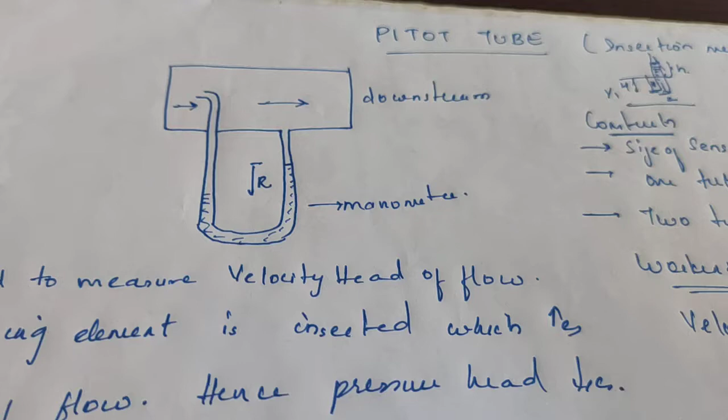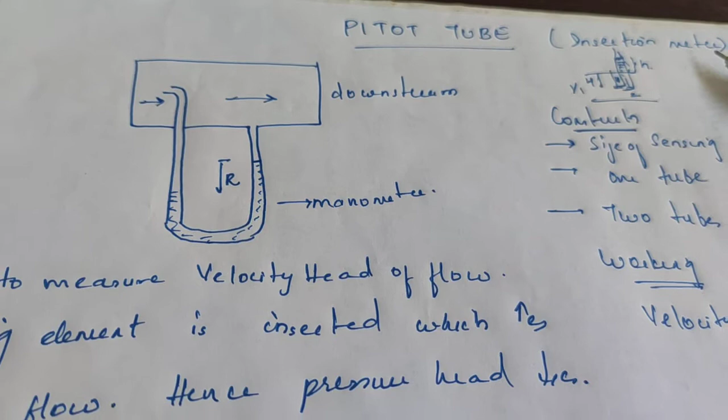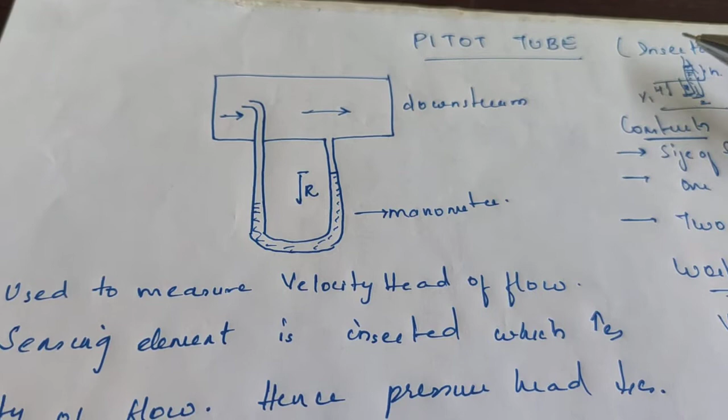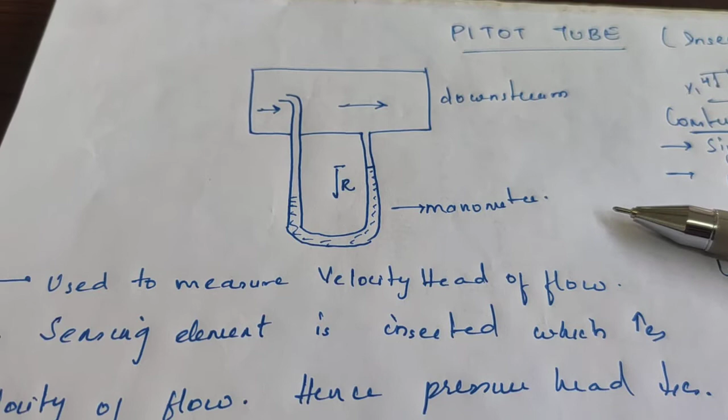In this video, we will discuss about pitot tube, also called as insertion meter. Like orifice meter is called as variable head meter, the same way pitot tube is called as insertion meter. This pitot tube is majorly used to measure the velocity difference, velocity head of the flow. In the previous orifice and venturi meter, we have measured the pressure difference, but here in this pitot tube we will measure the velocity difference, velocity head of the flow.

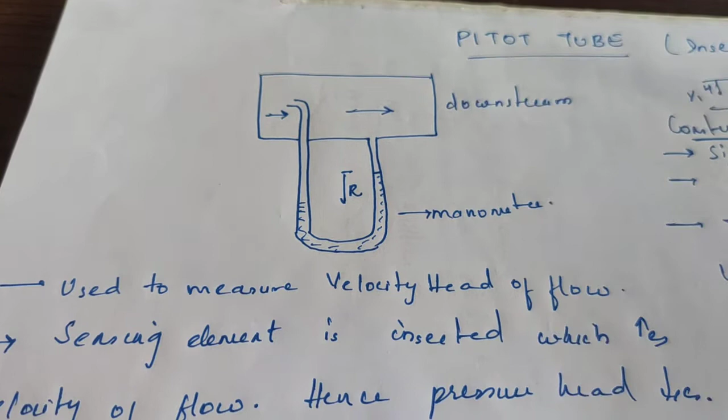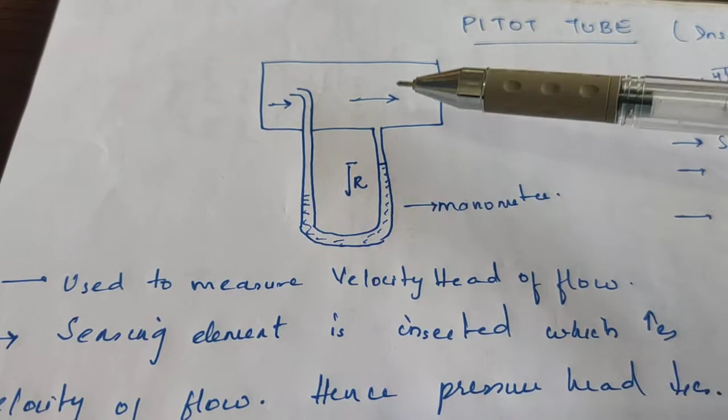Now in this pitot tube, a pipeline is there, a small pipe in which the fluid is flowing in this direction, and at the center of the tube we are attaching one manometer. At one side of the tube, the manometer is attached, and to the two ends of the manometer, two pipes are being inserted and attached.

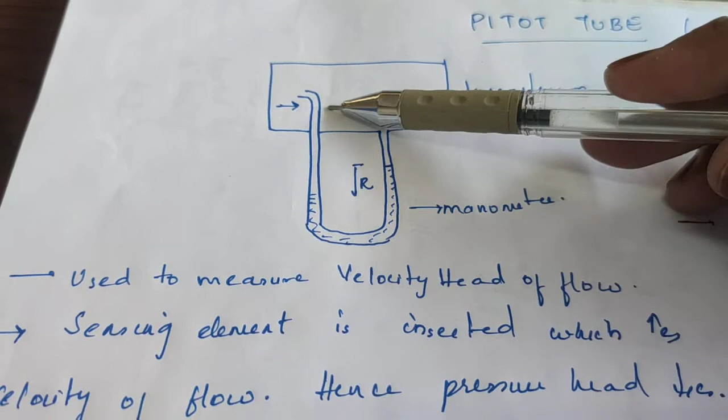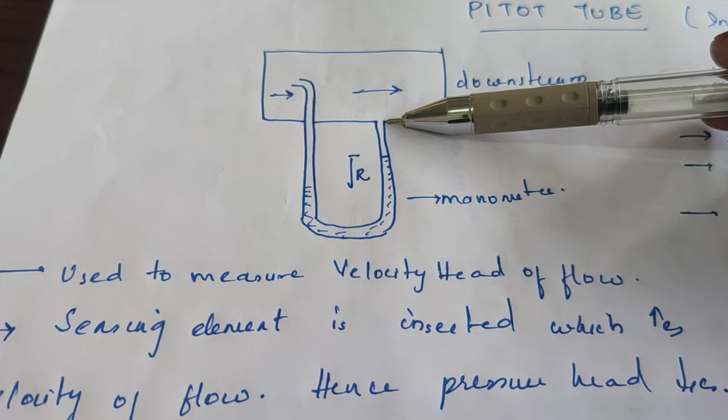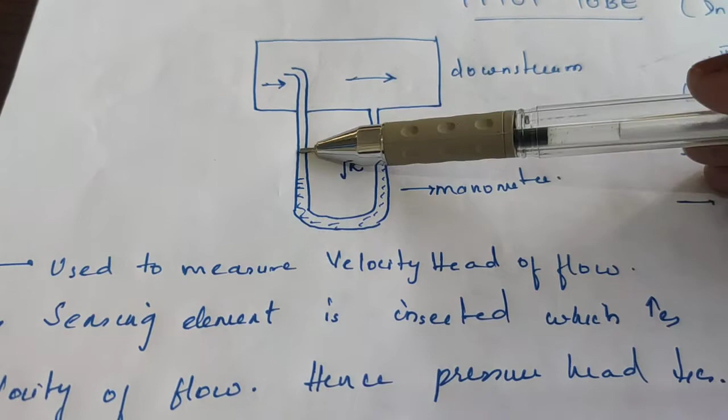One pipe is parallel to the flow of the fluid, and one pipe is perpendicular to the flow of fluid. These two pipes are attached to this pipeline such that one pipe is perpendicular to the flow of fluid and one pipe is parallel to the flow of fluid, and the two ends of the pipes are attached to the manometer.

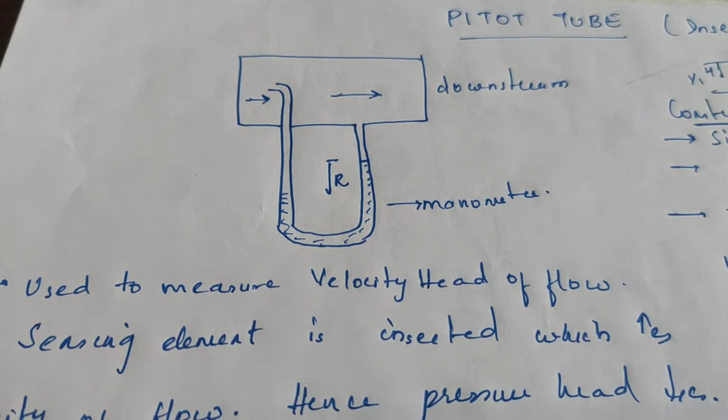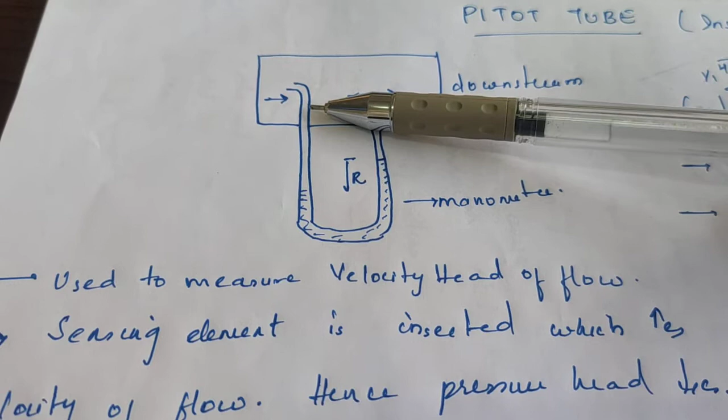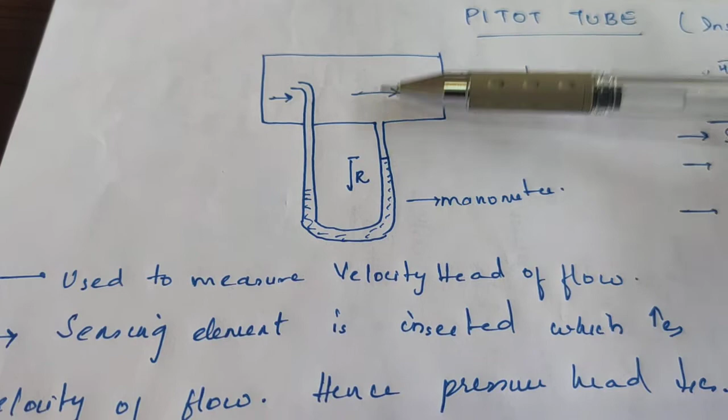The setup of this device is such that a straight pipeline is there in which the manometer is fixed to two pipes, inserted such that one end of the tube is perpendicular to the flow of fluid and one end is parallel to the flow of fluid. This manometer is used to measure the pressure difference, and velocity is calculated at two different points in the pitot tube.

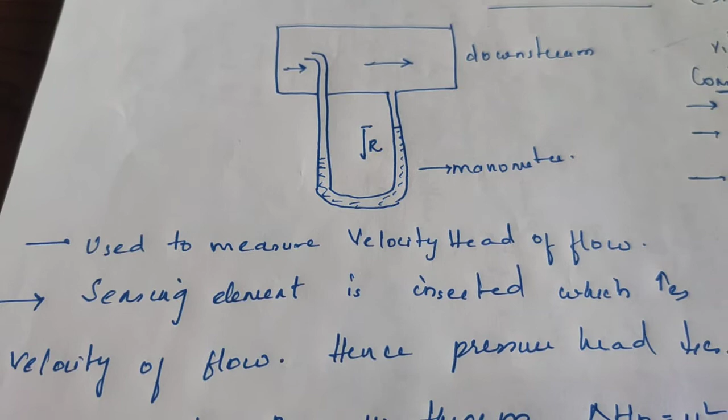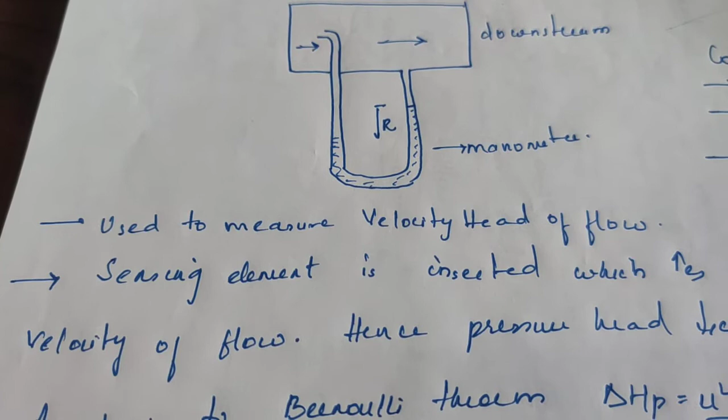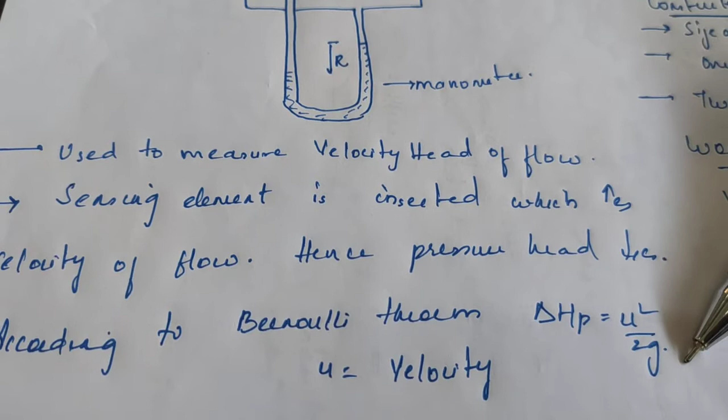Now as you know, the basic principle of Bernoulli's theorem, as seen in orifice and venturi meter, states that whenever fluid velocity increases, the pressure head decreases. This is already said in Bernoulli's theorem, and we get the formula delta Hp equals u square by 2g, meaning pressure head difference equals velocity square by 2g.

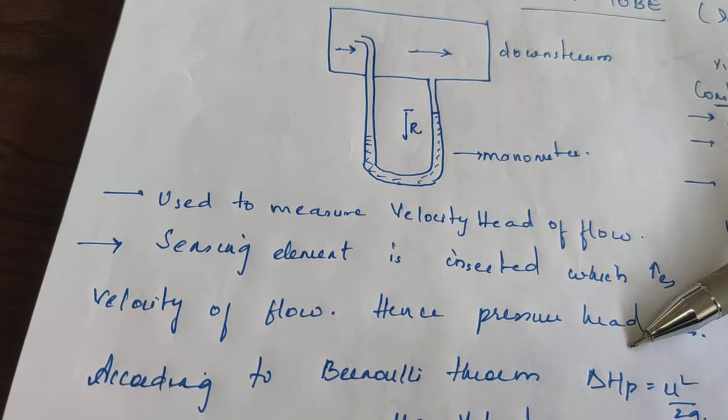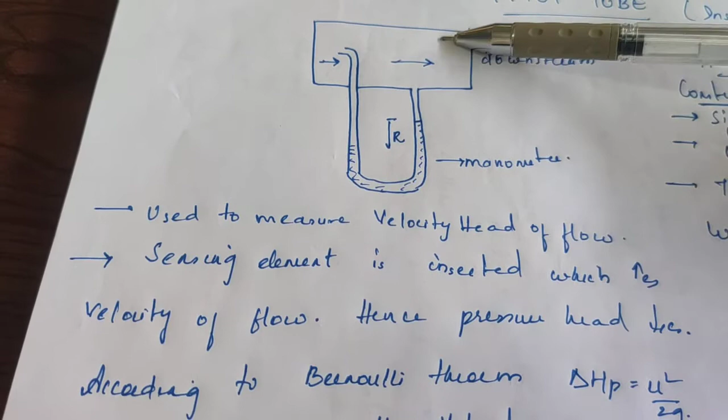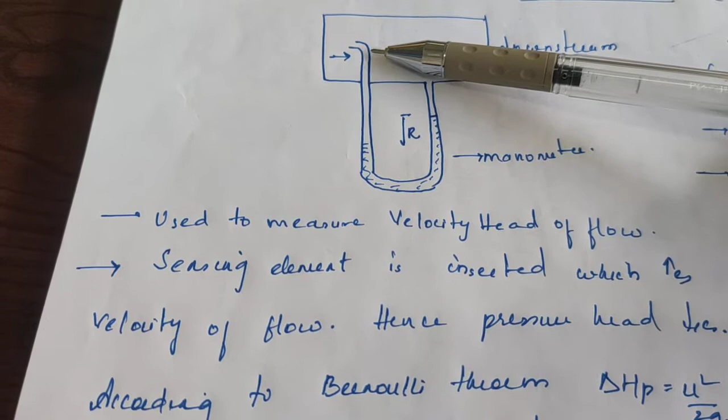By taking this equation, we get a derivation, but here the derivation mainly focuses on the velocity. This is the main construction: a main pipeline is there in which fluid is flowing, two tubes are fixed to this pipeline such that one tube is perpendicular to the flow of fluid and one tube is parallel to the flow of fluid. The two ends of the tubes are attached to a manometer.

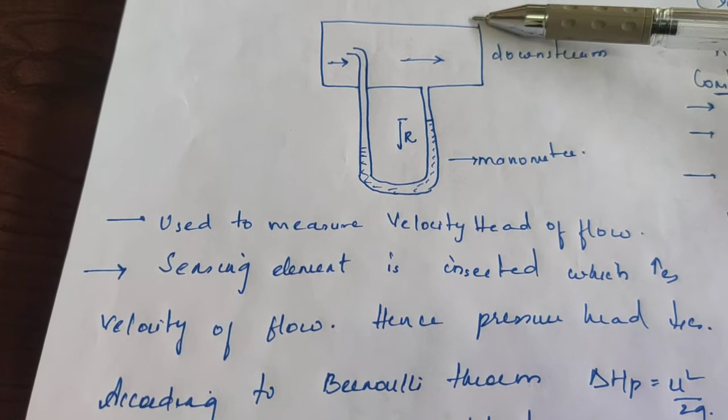This is the construction, and the principle here is that this is mainly used for measuring the velocity head or velocity difference in the flow, and by using Bernoulli's theorem we calculate the velocity difference.

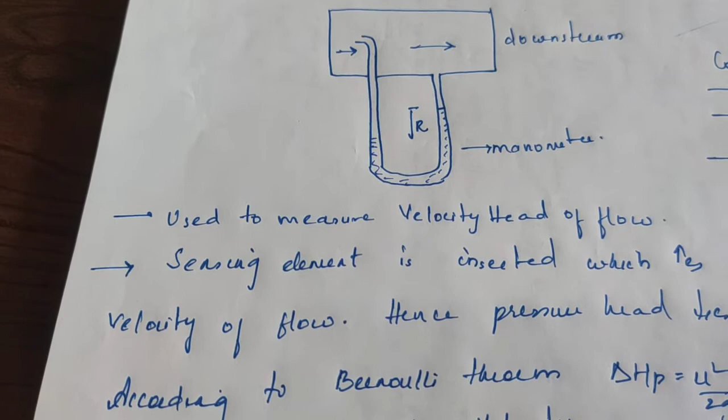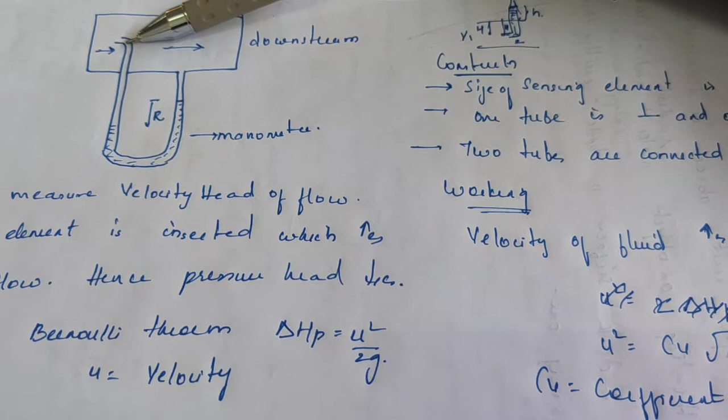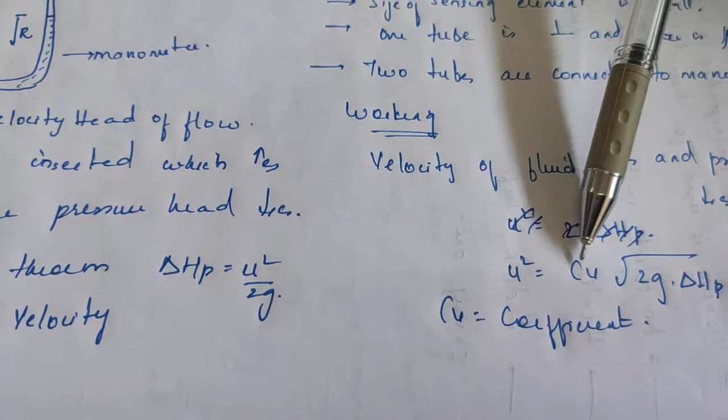Now the working: fluid is flowing in a pipeline such that when it enters the perpendicular position, there will be a difference in velocity at two different points. That difference in velocity is calculated using Bernoulli's theorem, and the equation is u square equals Cv under square root of 2g delta hp. Here Cv is a coefficient and u is the velocity difference.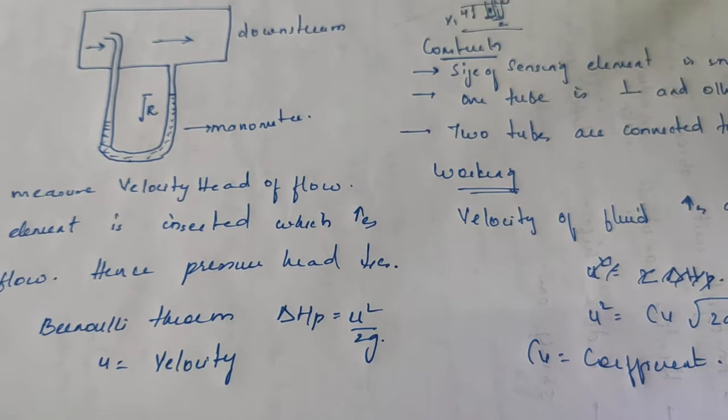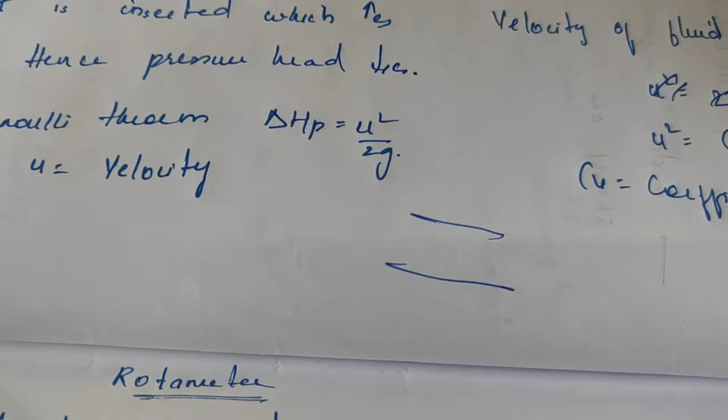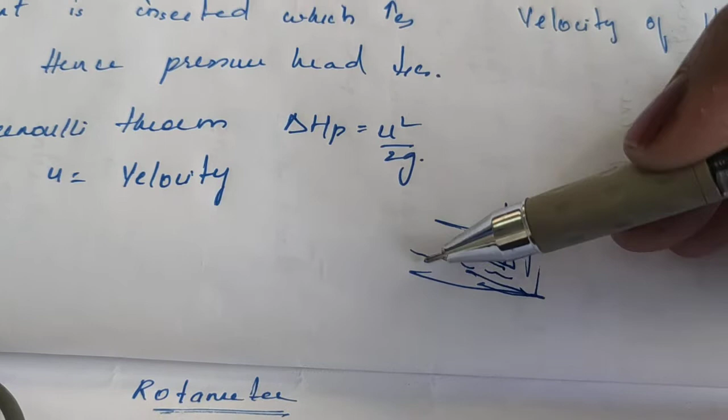To understand this phenomenon of the pitot tube in a basic manner, a pipeline is there in which the fluid is flowing continuously. When I insert one tube here in the perpendicular position, the fluid will continuously flow, strike this bending area, then move upward in this direction.

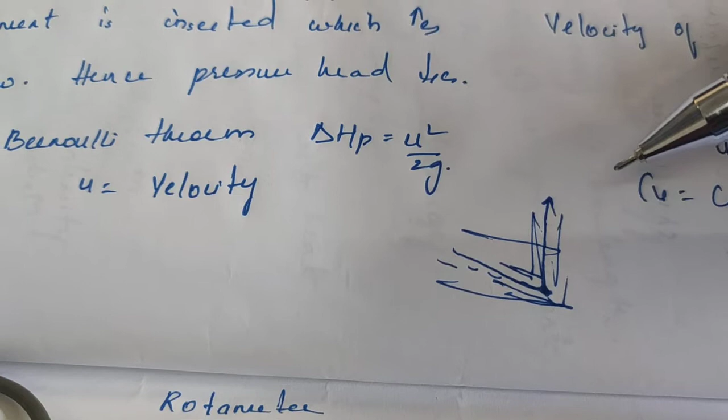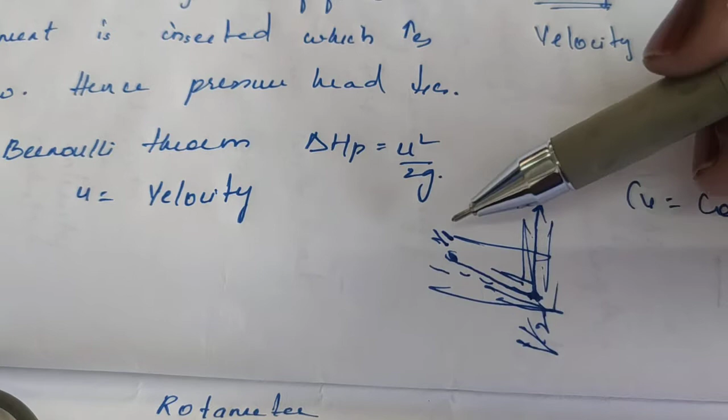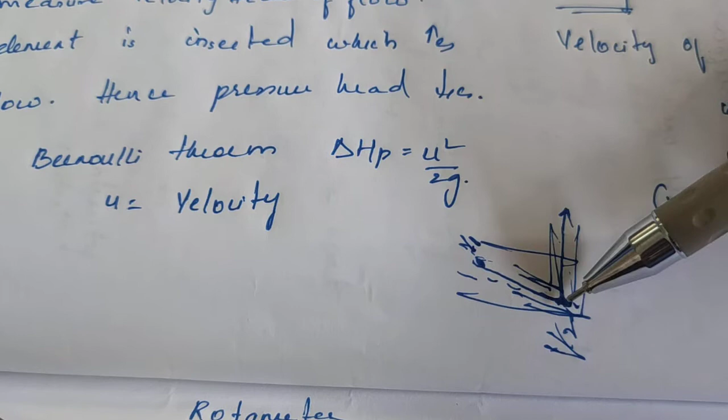The velocity of fluid at this point, v1, we keep as v1, and the velocity of fluid at this point, v2, is completely different. This difference in velocity, v1 and v2, is calculated using the Bernoulli equation. When fluid is continuously flowing, it is striking the constriction part, the bending part.

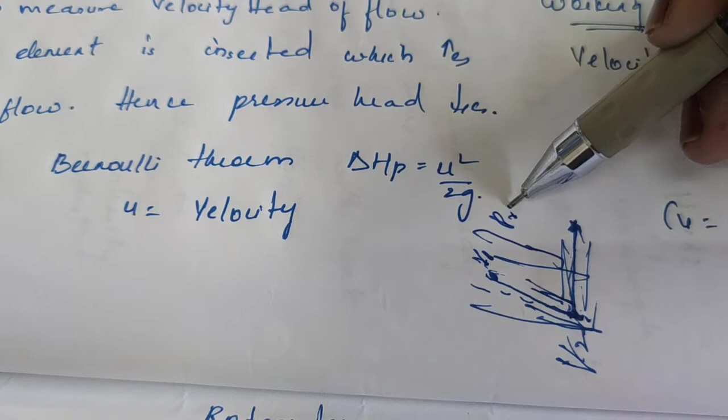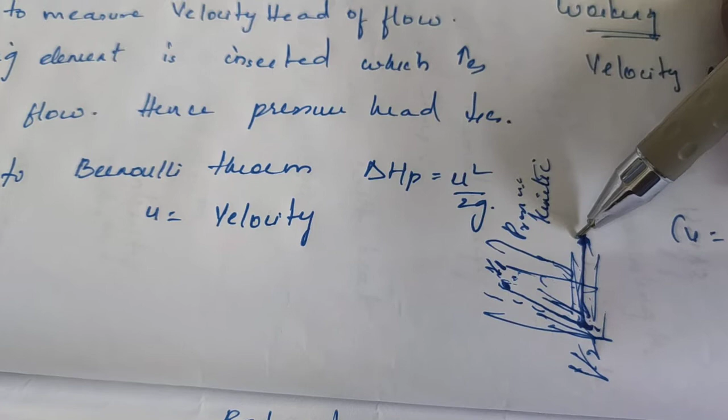And it is moving upward into a particular height. Here energies are converting - the fluid is coming with a certain pressure and certain pressure energy and certain kinetic energy. The fluid is continuously in motion, coming with a certain pressure energy and kinetic energy. Suddenly it strikes there and moves to a particular height such that it moves till the kinetic energy converts to the potential energy.

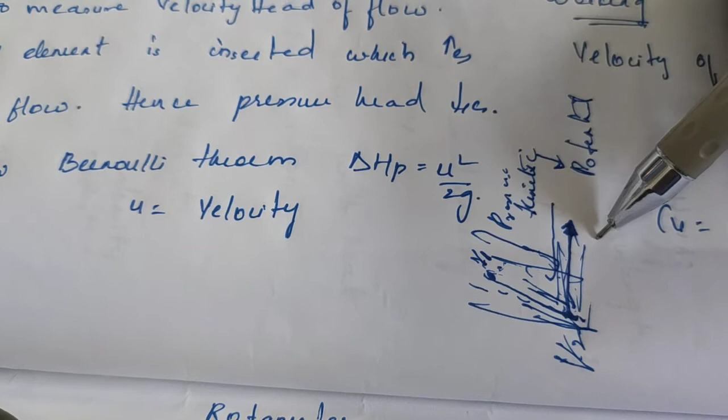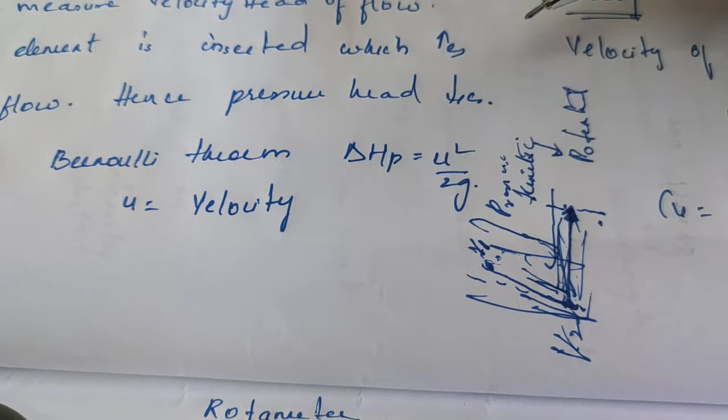Till the kinetic energy gets converted to potential energy, the fluid level will move up. After a particular level it will stop, when the higher potential energy is reached.

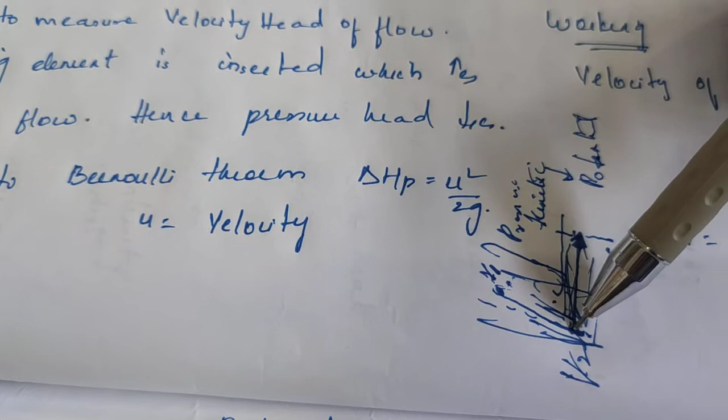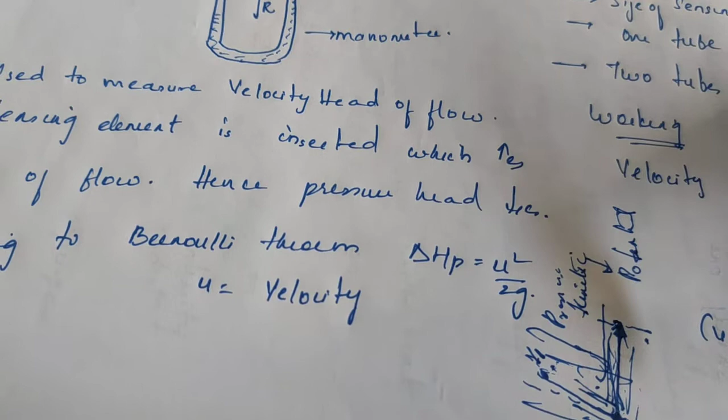So to understand this, the fluid is coming with a certain pressure energy and kinetic energy, it reaches a particular point and moves upward in the inserted pipeline such that it reaches a particular height, that height being potential energy. Hence three energies are working in this diagram.

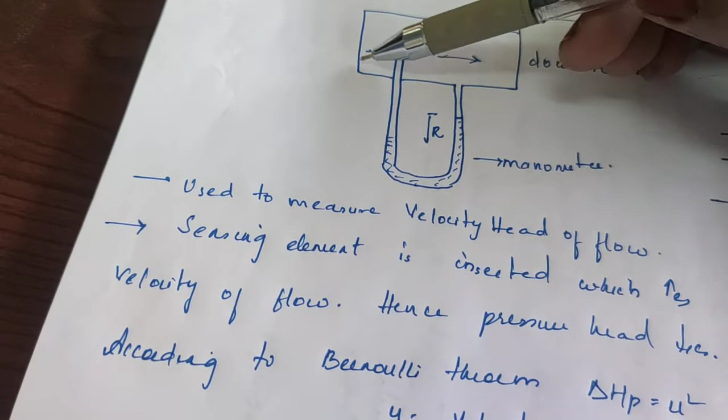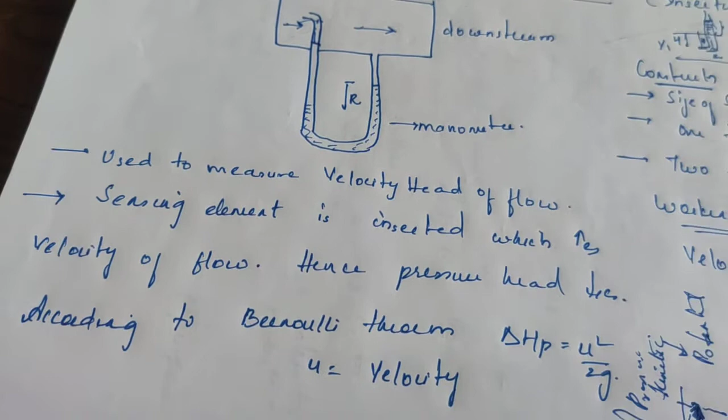The same diagram reflects again here - fluid is continuously striking here and moving upward to a particular height, and this difference in velocity is noted down and derived using the Bernoulli equation. The final equation is u equals Cv under square root of 2g delta hp.